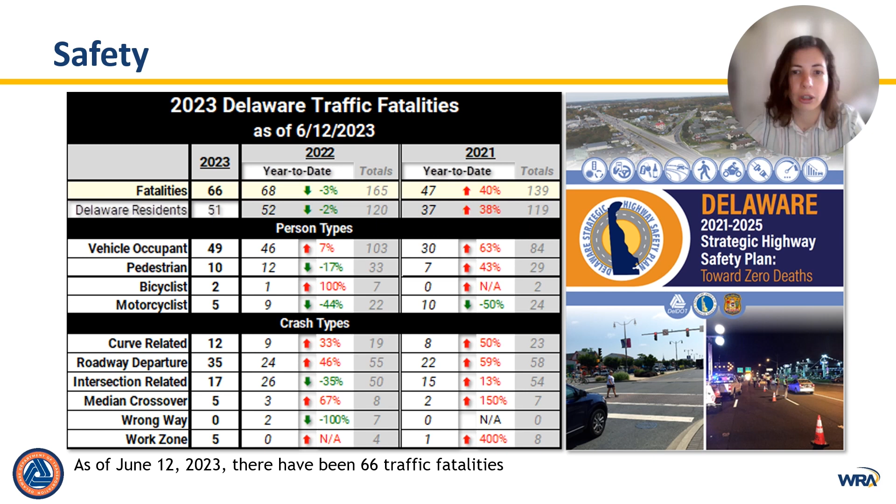I also want to provide a brief overview of our recent traffic fatalities on our roads. You'll see under fatalities the number 66. That was as of June 12th, which is a little lower than the number of fatalities we had last year at this time, which was 68, but significantly higher than back in 2021, where we only had 47 fatalities at this time. Safety on our roads is paramount, so please encourage your friends, neighbors, and family to drive slow, buckle up, and practice safety as we work together to implement the strategic highway safety plan.

The goals of the SR1 Bikeway study are threefold: to improve actual and perceived safety for people who bike in the vicinity of Route 1, between Lewes and Rehoboth; to provide better access to businesses for people who walk and bike—for example, right now someone who lives in a neighborhood directly adjacent to Route 1 may not be able to get to that business without driving in order to safely access it; and, if people have the opportunity to elect to walk or bike safely, we hope that will reduce vehicular traffic. While not everyone will choose to walk or bike, if people who are interested have the opportunity, that will reduce congestion on our roadways and hopefully make those who do need to drive feel less congestion when doing so.

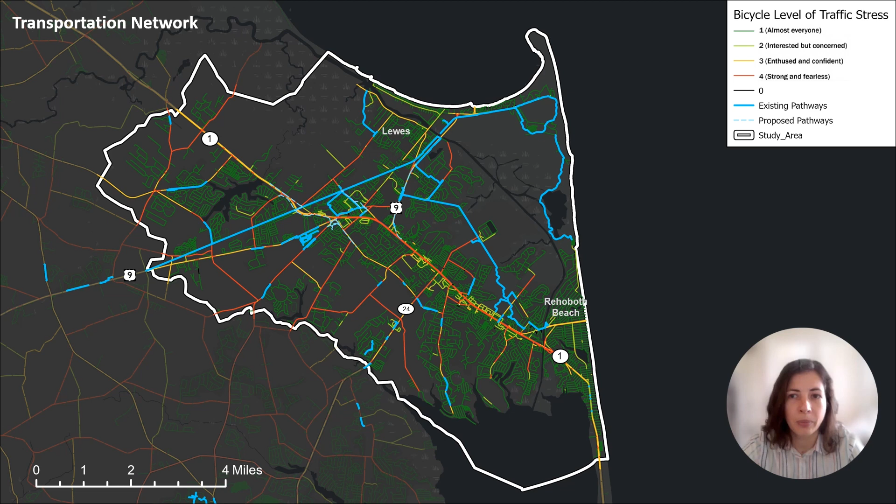The highlighted area is really where we're honing in for this study. Although we're looking a bit more broadly at connectivity, the areas we're identifying for improvements are really hugging the Route 1 corridor as shown on the screen.

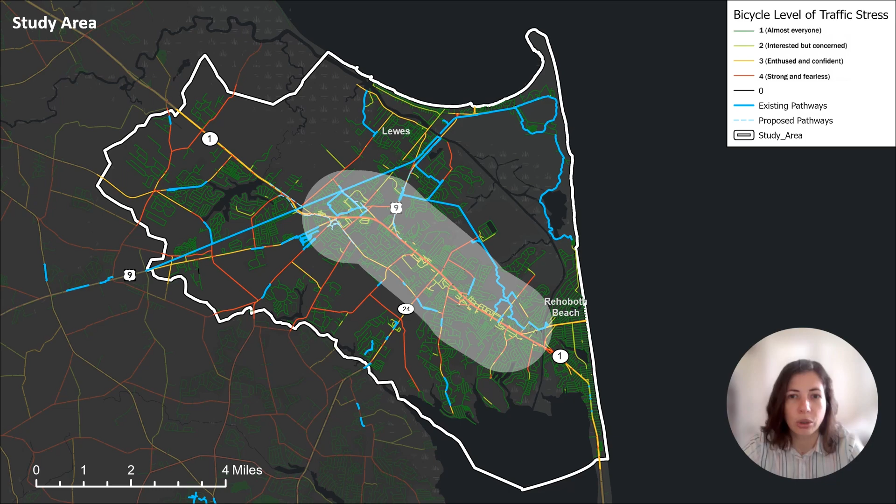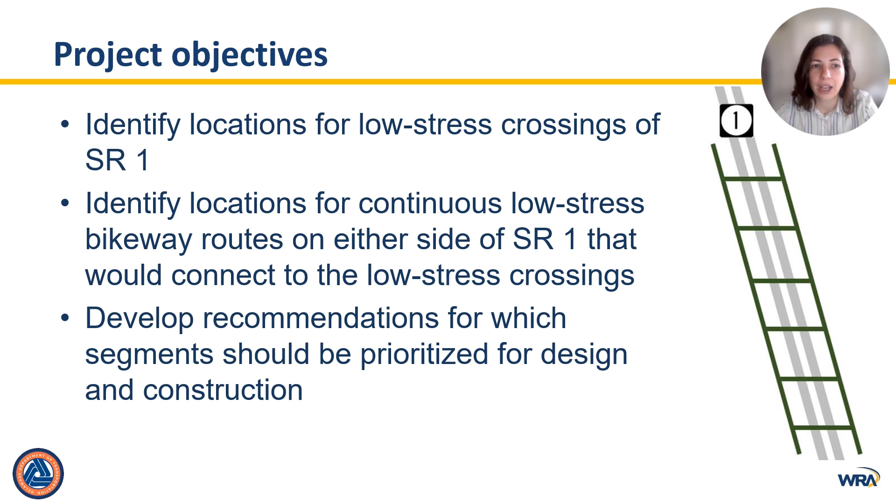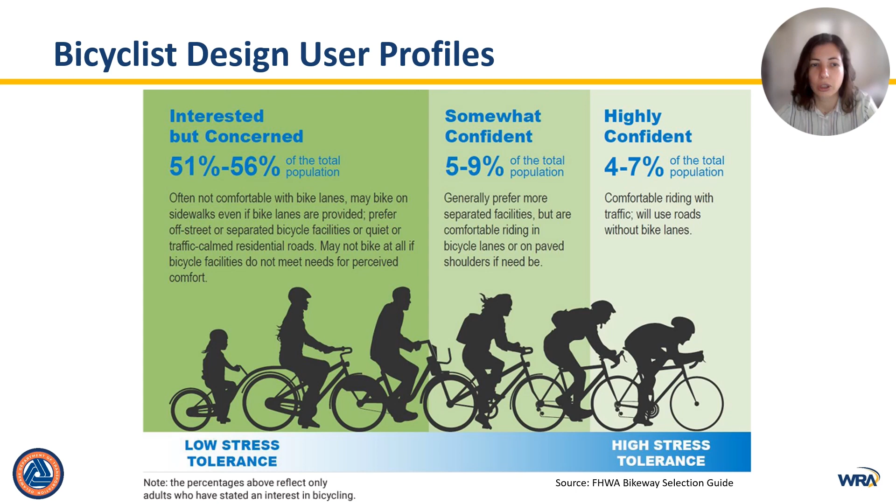And we do have people who are highly confident, but that is a much smaller portion of the population. Those are our avid road riders. They have a higher stress tolerance, but we want to make sure when we're making investments in our transportation network for people biking and walking that the vast majority of people can use it, not the select few. So we've been moving to implement lower stress facilities that are comfortable for riders of all ages and abilities.

So we can basically look at a given roadway in the study area or anywhere in the state and say, okay, we know what the posted speed limit is, and we're also able to do studies and have some access to data that tells us what speed people are actually traveling, and then look at how many cars are on the road, and that's also data that's available, and decide whether a shared lane or a sharrow is appropriate, and that's really only on very low speed, low volume streets, those neighborhood streets.

Is a bike lane appropriate? That works pretty okay if speeds are 30 miles an hour or lower and it's only around 6,000 or fewer cars a day. Or do we need to have a separated facility? Pretty much if you're looking at speeds around 35 miles per hour and volumes tending towards 7,000 or more, that's average annual daily volumes, we are looking at more of a separated facility.

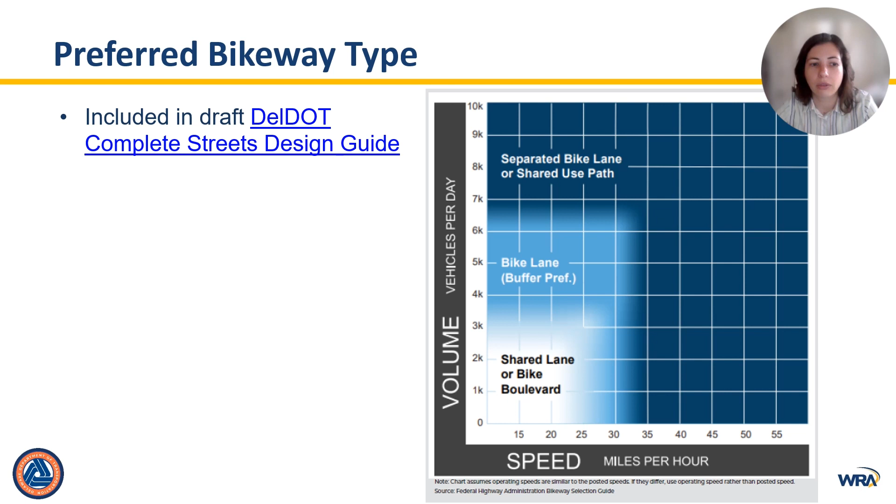So we've been working on this project for quite some time. What we've done to date is we started with conversations with some key community stakeholders, did a lot of site visits, biked the corridor, took a lot of photos. We analyzed some data, that level of traffic stress network I already told you about, as well as some data from a platform called Streetlight.

Last summer we were out and held pop-up outreach events on the trails and conducted a survey. We then came back and used DelDOT's bike travel and network models to analyze some crossing locations I'll talk about in a moment. Had a public workshop this past November and a survey, and also coordinated with DelDOT traffic and operations regarding potential crossing and facility improvements. So we're back here tonight to really share some exciting projects in the pipeline and collect some feedback from you on some additional connections in the vicinity of those projects.

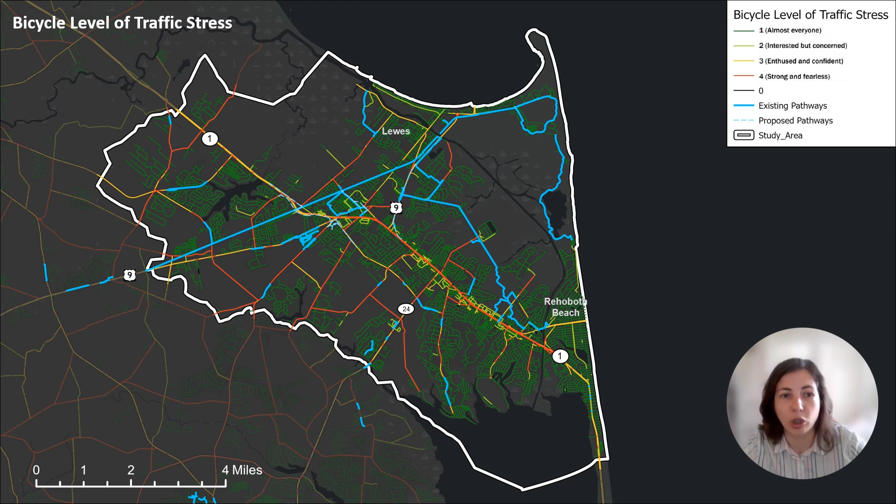So we already talked about level of traffic stress, but I mentioned briefly a network model looking at how we can analyze improvements using this. So we know this network shows us where people will bike if they have a lower stress tolerance, again, where that majority of our biking population is comfortable riding. And we also know what our population density is.

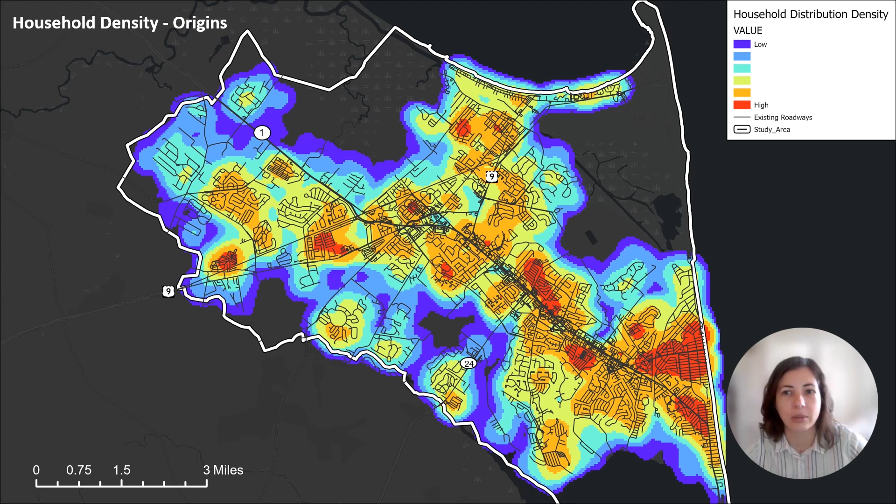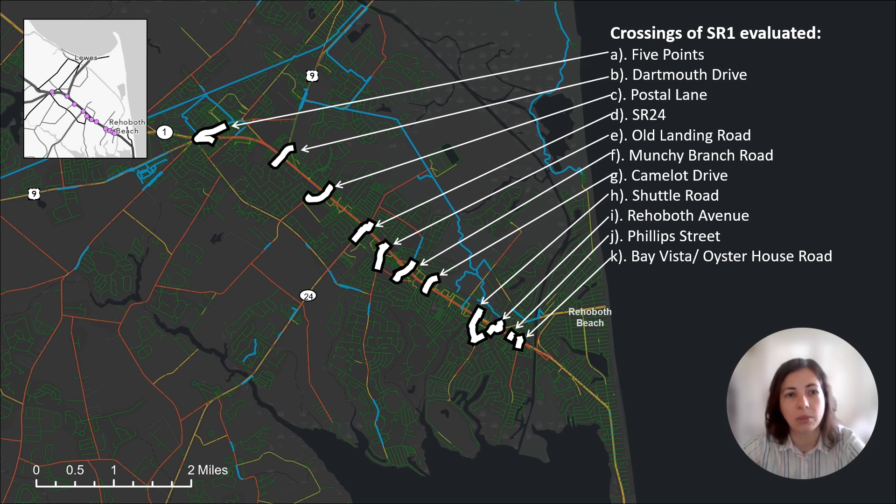More on that in a little bit. Also, further south on the corridor, Shuttle Road came out scoring highly, as well as Miller and Munchy Branch. We're going to hear more about that tonight. Phillips Street and Rehoboth Avenue. So Shuttle, Phillips, and Rehoboth are all kind of clustered in the same area at this bottom end of the corridor.

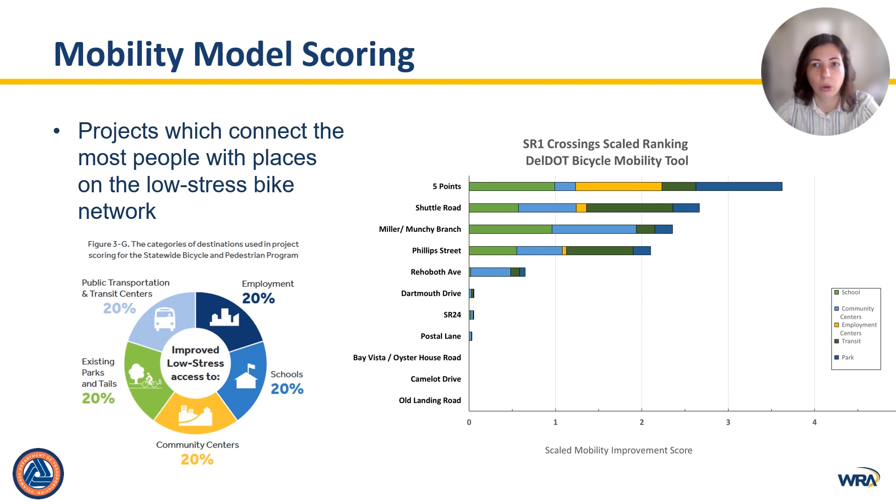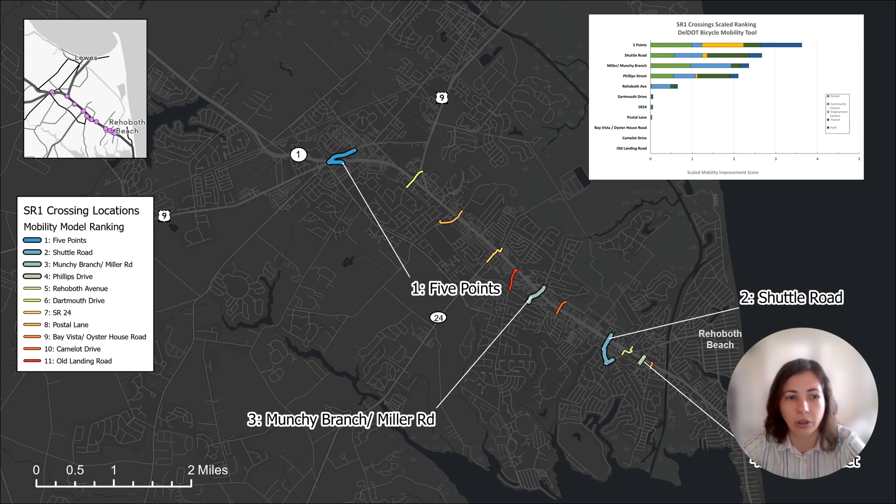This winter when we came out, we also asked the public which locations would be most beneficial. Although we had pretty limited responses to that survey, the public agreed with the 5 Points intersection. Also, we heard Munchy Branch Road was a very high priority. Shuttle Road came in at 5th. A number of folks commented that Old Landing Road and SR24 would be a benefit.

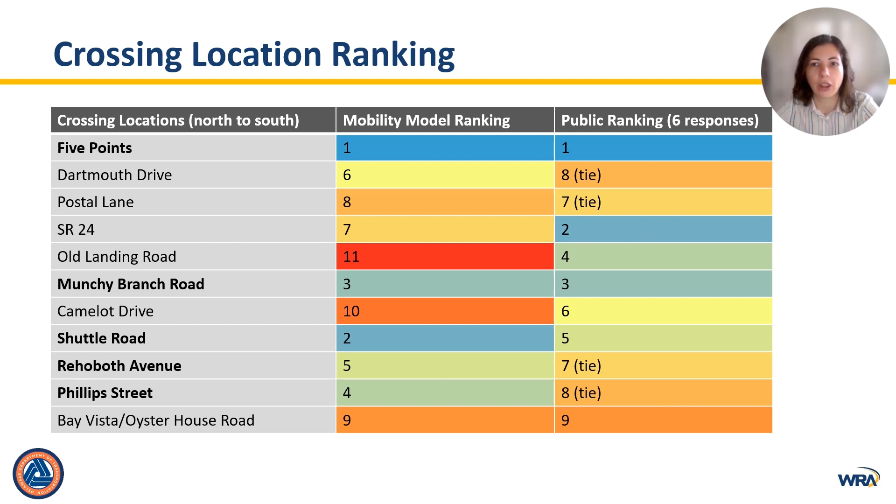But the way those streets are configured, 24 is kind of a T intersection - it's not a straight crossing. And Old Landing has some issues as well. That makes crossing in those locations a little challenging.

But to quickly review 5 Points: I'm sure those of you who live in the area may have heard about the 5 Points Working Group. That is a body of folks who have been volunteering for many years to help DelDOT identify and prioritize improvements in this area. Right now we do have a number of projects in the pipeline surrounding the 5 Points intersection that will improve circulation for people walking and biking. That includes the Plantation Road project, which is currently under construction, the realignment of Old Orchard Road at Wescoats Corner, as well as the Minos Conaway grade separated intersection.

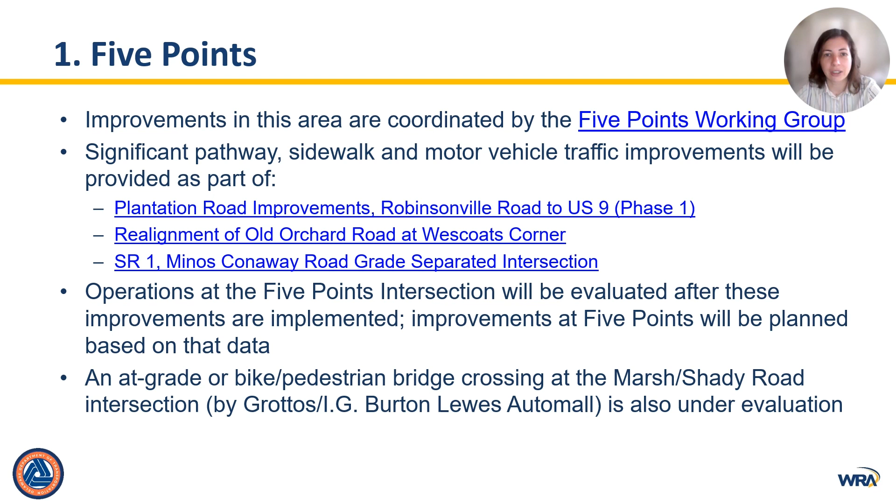So you may ask, well, what about 5 Points itself? What we have found through analyzing the area is that we cannot get in to implement any changes to the 5 Points intersection until we improve the surrounding roadway network. We need to make sure that people traveling, whether by car, bike, or walking, have other ways to get around and across Route 1 to navigate through the 5 Points area. Because if we were to go in and attempt to make improvements at 5 Points right now, it would totally shut down traffic circulation. So these 3 projects are 3 examples of ways we're getting ready to tackle 5 Points. We are also evaluating...

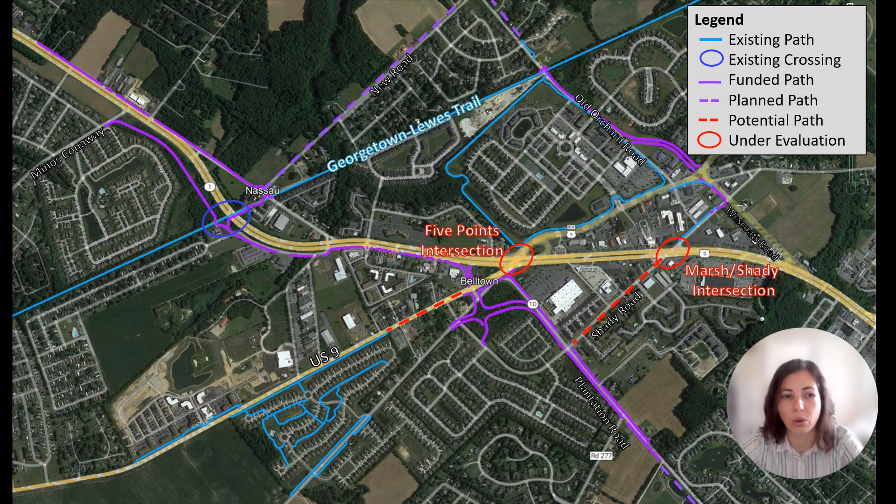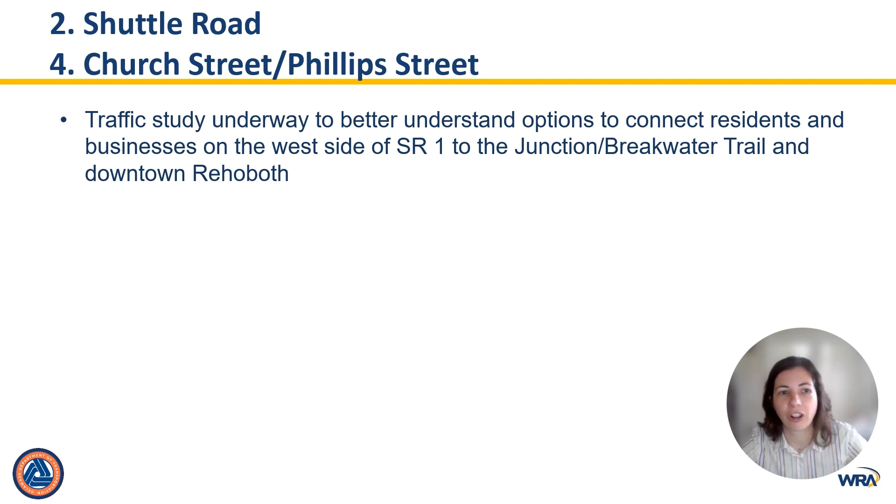That brings us to the intersections that scored second and fourth in the crossing analysis: Shuttle Road, and Church Street and Phillips Street. Those are down near the Rehoboth Avenue split. There is a traffic study underway to better understand our options to connect residents and businesses on the west side of 1 to the Junction Breakwater Trail and downtown Rehoboth in that area.

Right up at Holland Road, there is a HAWK signal that allows you to cross currently. And right at the Rehoboth Avenue split, there is a multi-stage crossing that has a HAWK signal on the southbound leg, and then you have to wait for the signals to turn to get across all the legs of Route 1 and Rehoboth Avenue. So we know those crossings exist.

We've also received feedback from a number of you through outreach that the crossing is not very comfortable, and it takes a very long time to get across the street in that location. So we're looking at other areas, and once we determine whether crossings are feasible or not, we want to better tie into the surrounding trail network. On the northeast side, the Junction Breakwater Trail ties in on Hebron Road, with a connection over to Rehoboth Avenue and the canal.

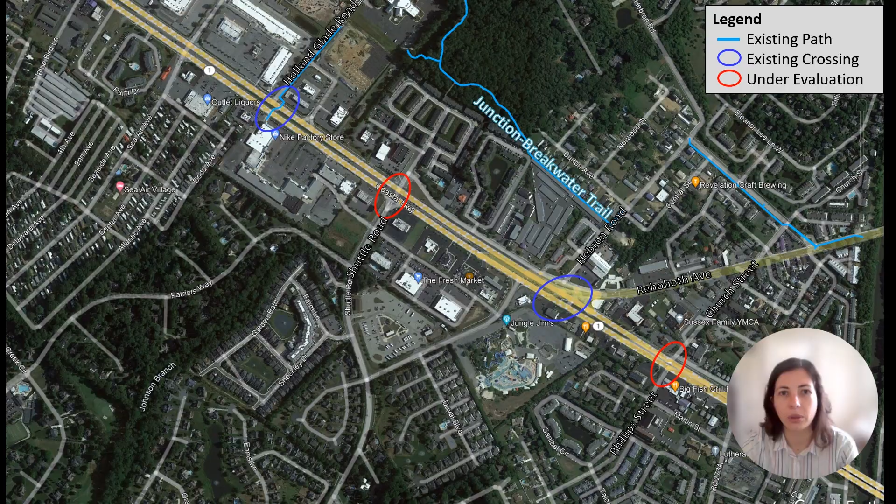That leaves us with our third priority intersection, which is Munchy Branch Road and Miller Road. This is actually really the focus of the rest of our workshop, as well as the projects that are going to be presented this evening.

If you were not in attendance at the live workshop, you'll see on the project website there are a number of links to PDFs of boards that were presented at the workshop. Once you have a chance to listen to this presentation and review those boards, if you have questions, you can forward them to us and we can answer them for you.

So there are already a number of pathway projects in the vicinity of Munchy Branch and Miller Road. I'm going to go through those one at a time. One is some improvements up near Kings Highway, two is phase 2 of Plantation Road I alluded to earlier in the presentation. Numbers 3 through 6 are where we're focusing: the Old Landing Road and Warrington Road intersection improvements, the Airport Road extension project, Munchy Branch Road pathway phase 2, and actual improvements at the Miller Road Munchy Branch Road crossing as part of the HEP program.

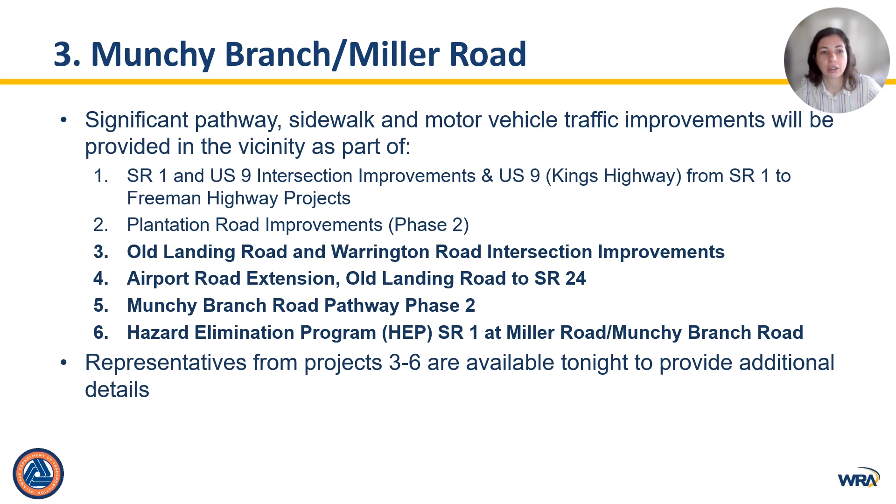So here's a map showing all those projects. Up in the very top of your screen, you'll see side path improvement shown there, kind of heading off on Kings Highway. Number 2 shows that Plantation Road connection coming down to SR24 and tying into the existing pathway along Warrington Road. Number 3 is that Old Landing Road and Warrington Road intersection improvement, which will include tentatively a side path along Warrington Road.

Tying into, again, that developer project, and then extending north up Old Landing Road. Number 4 on the map is the Airport Road extension project. That will continue that side path up Old Landing Road and then along Airport Road itself, tying up to the Munchy Branch Miller Road intersection with 1. Then that intersection improvement itself is right there. And lastly, Munchy Branch Road pathway phase 2 is denoted by number 5 on the map.

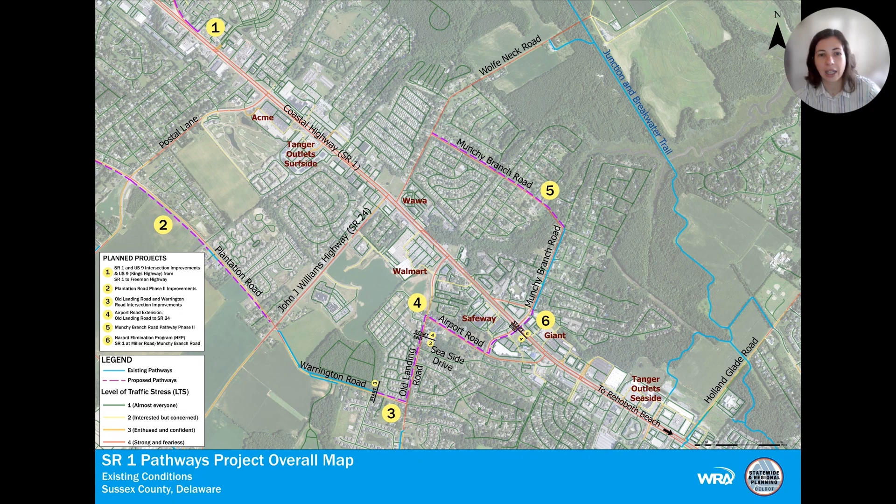So that's kind of the overall connectivity we're looking at. As you can see, that really will allow folks to ride basically from the 5 Points area on Plantation Road, parallel to 1 down to this area, and then up and cross over at the Munchy Branch intersection and get back to Wolfe Neck Road, which provides some connectivity to the Junction and Breakwater Trail and into that trail network. Of course, these paths will also allow people to get into a lot of the retail and commercial development right along 1.

So with that, some more details. The SR1 and 9 intersection improvements, that project is scheduled to be implemented in advance of the bigger Kings Highway project, which will extend from 1 all the way to Freeman Highway. I'll show the concept design momentarily, but did want to let you all know that that bigger project will be hosting a public workshop later this summer or early fall, so stay tuned. If you sign up for updates on our project website, we will be sure to notify you of that workshop.

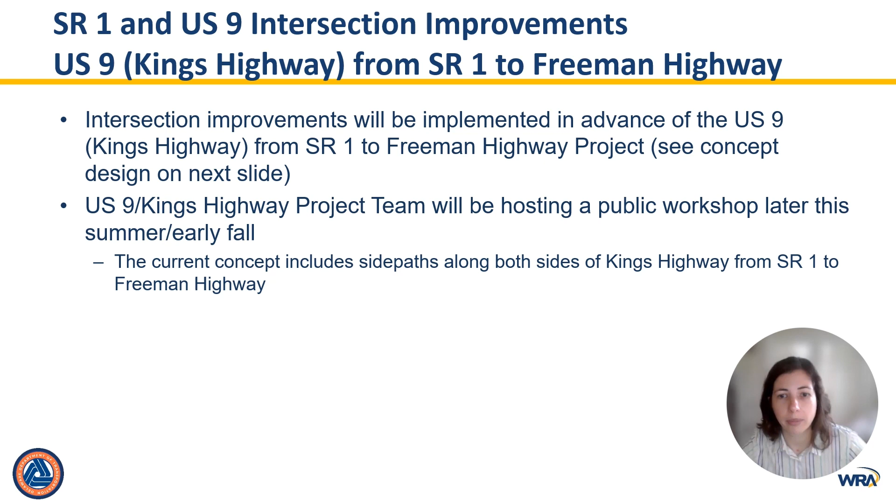Here is the concept for intersection improvements at 1 and 9. So you see here, right now, if you're traveling northbound on 1 in a vehicle, it's a pretty sweeping exit ramp, and you can take that at speed. So what is being proposed, you see kind of in the green area, is to tighten up that turning radius. Someone who is turning right onto Kings Highway will have to slow down and yield to anyone who's crossing in that sidewalk before continuing onto Kings Highway.

And people biking or walking have the option to jump onto a new side path there, to use that side path and the marked crosswalks to get through that area, because we do know that is kind of a pinch point where there is some conflict between people biking and driving. So again, this project would be incorporated before the Kings Highway project.

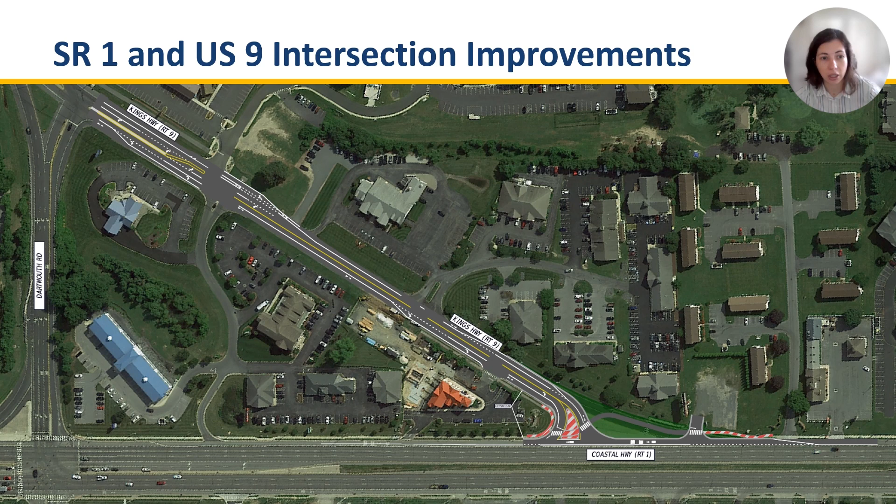Plantation Road Phase 2, again, includes side path improvements between Plantation Road Phase 1 and SR24. So that project will also be hosting a public workshop later this year. Again, if you're interested in receiving notification of that, please let us know in your comments. We'll add you. So that was a lot of information.